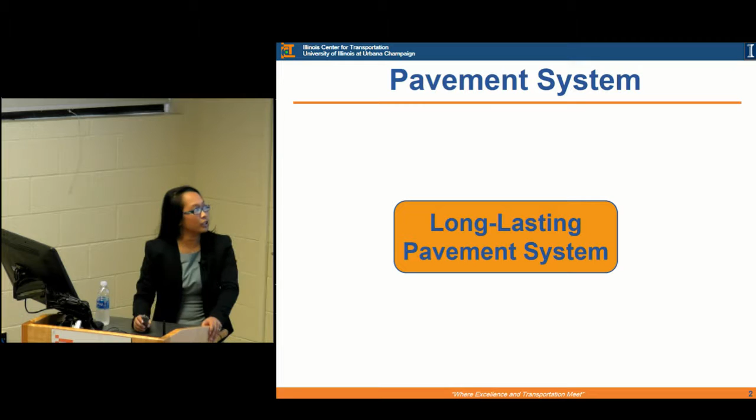So first, let me set the higher knowledge, or what's the main umbrella of what we're doing here. First, we know that in order to design a long-lasting pavement system, we have to include some critical parameters, including materials, loading, pavement structure, and environment. This process is widely used in any pavement design approach.

For instance, in the US, we use a mechanistic empirical approach wherein we couple two approaches. When we talk about mechanistic, essentially we're using either analytical or semi-analytical modeling to predict pavement responses in terms of strains, stresses, or deflections. That is paired with an empirical domain where those responses, for instance in terms of strains, are quantified using transfer functions to determine the number of repetitions before the pavement fails in a specific type of distress.

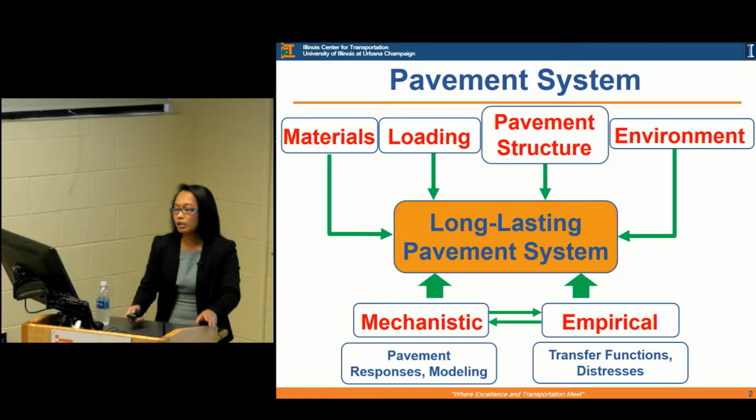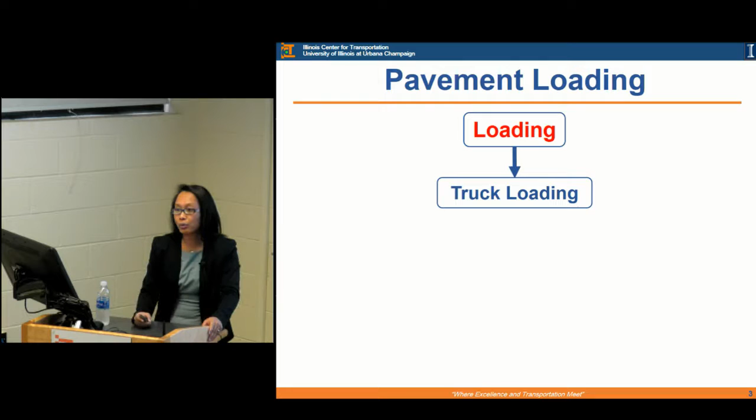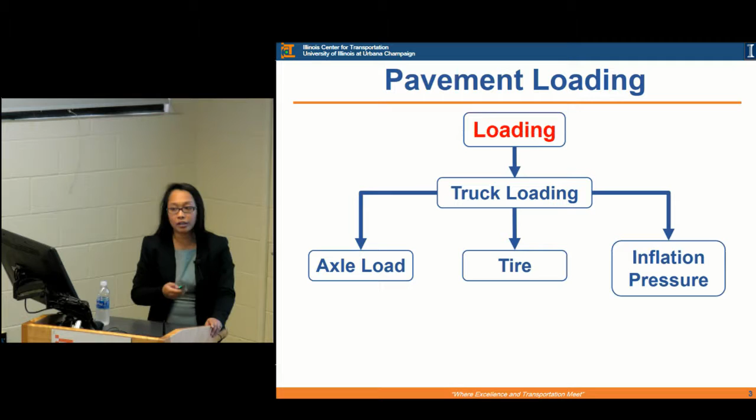In particular, for my presentation, I'll be focusing on the loading component of this wide topic, and particularly truck loading, as we know, is the governing factor in pavement design. In accordance with this, we know that there's a given axle load, tire type, and inflation pressure that govern this truck loading. In reality, combining these parameters, what we expect is a three-dimensional contact stress at the tire pavement interface.

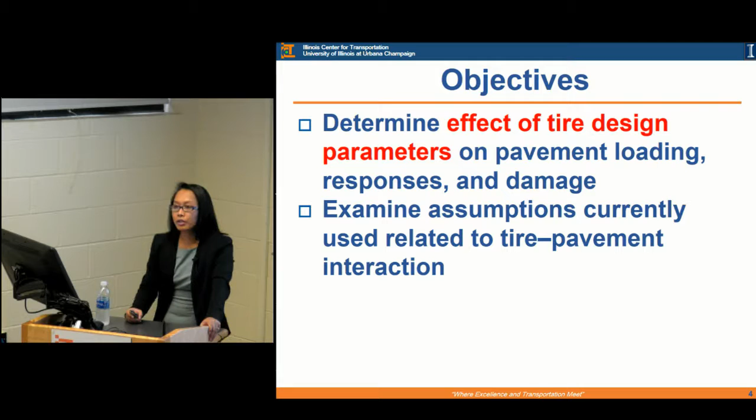For the objective of this project, what we wanted to determine is the influence of different tire design parameters on pavement loading, response, and damage, and also how current assumptions in pavement design as of now relate to this tire-pavement interaction.

For the methodology of this project, what we've done is consider two typical pavement structures. You can see here the corresponding thicknesses. For the thin pavement, which we'll use throughout the presentation, it simulates a low volume road where we have a single asphalt concrete layer of 4 inches and a granular base that is 8 inches.

On the other hand, for an interstate highway, we considered three different asphalt concrete layers: the wearing surface, intermediate layer, and binder layer, with corresponding thicknesses, and also a granular base. As I pointed out, the main premise is to understand how these contact stresses... the partnership came from Michelin because they were the ones providing these three-dimensional contact stresses considering different tire parameters, which we'll see later on.

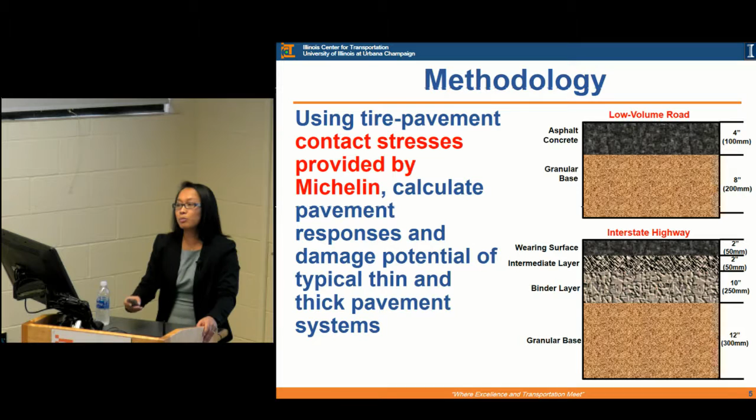From our group's perspective, what we can provide is how their contact stresses influence pavement damage. At the end of this project and presentation, we'll show you how we take into account not necessarily the full damage of these pavement simulations, but damage potentials of these two pavement systems.

First, I'd like to introduce the finite element model that we used for this project, and give a quick overview of the different assumptions and considerations we addressed. First, we considered a dynamic implicit analysis, which means we are considering the mass inertia and damping forces on the pavement structure as it's loaded by a truck tire.

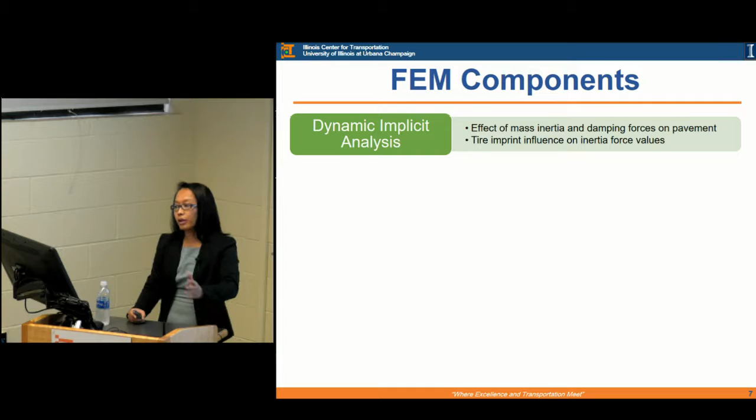Correspondingly, the difference of these components in the tire imprint would also influence the corresponding inertia value, so that's considered. The second one is the material characterization.

For the asphalt concrete, we consider it as a linear viscoelastic material with a nonlinear temperature distribution throughout all those AC layers. Also, for the base layer, for the thin pavement, as I've mentioned, that simulates the low volume road, we...

consider a nonlinear stress-dependent material property. On the other hand, for the thick pavement, given the thickness of the three layers that we've put on top of the base, we deemed that it was acceptable to characterize the base for the thick pavement as linear elastic.

As I've mentioned, we are using three-dimensional contact stresses, again highlighting the fact that in reality the contact stresses are non-uniform, and not only in the tire imprint, but also in terms of the stress distribution in the three orthogonal directions.

We're also considering contact area at the tire-pavement interface. Additionally, we are moving that tire-pavement contact stress continuously. Essentially, what we've done is provide a linear variation upon the entry and exit of that tire contact stress over a given element, so it simulates as if the tire is moving smoothly over our pavement model.

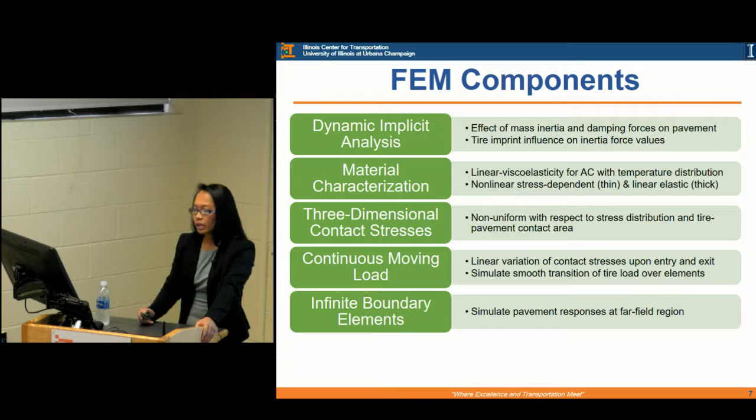We'll see this in the next slide, but just a quick definition: we used an infinite boundary element. The main premise is we didn't want our pavement finite element model to be extremely large, which costs computationally—the time to do the simulation would almost take forever if we tried to simulate a mile-long road, and that's not really feasible. So we use these infinite boundary elements to limit the geometric domain of our model while still simulating the far field region of the pavement structure.

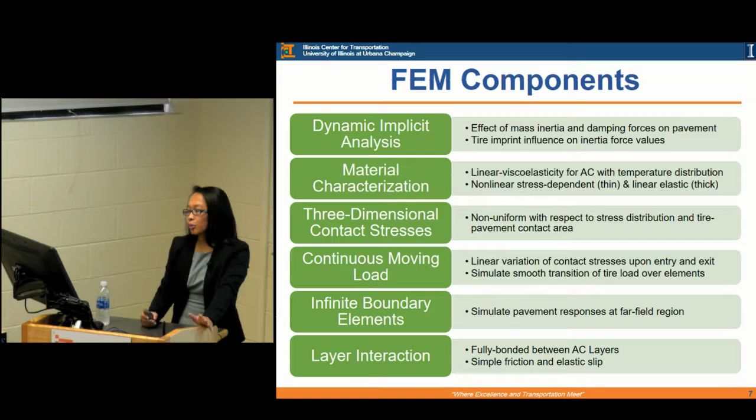And lastly, we also included layer interactions. Between the AC layers, we considered fully bonded conditions. And obviously, the interaction between the AC and the granular layer down to the subgrade will be different, so that's also accounted for.

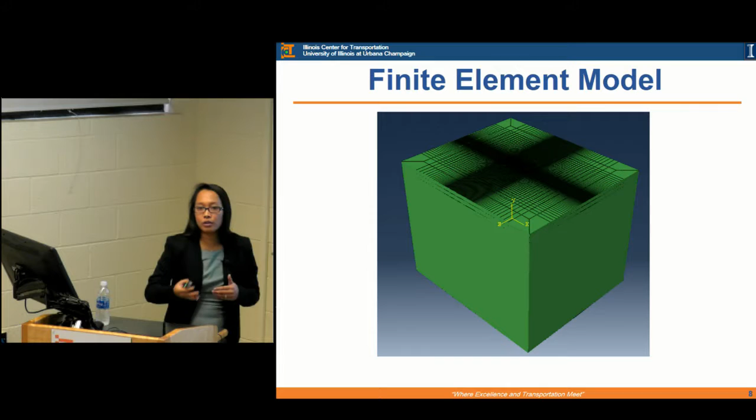Here's a picture of, I believe, the thick pavement model. Generally, the height or depth of this model is around 4.5 meters. And the planar geometry is driven by the tire type, so the dual tire assembly will have a slightly different geometry than the wide base tire assembly.

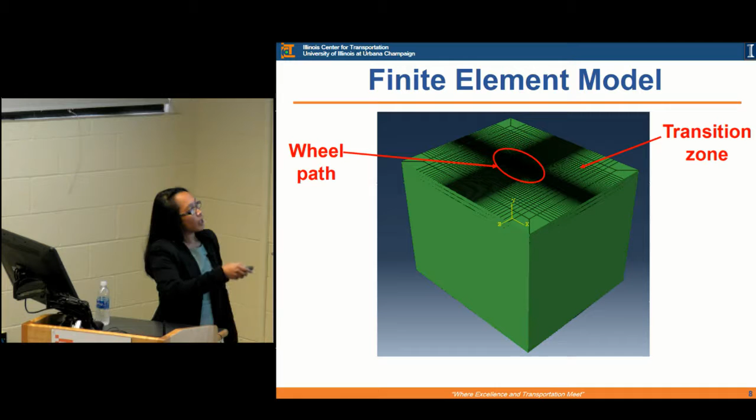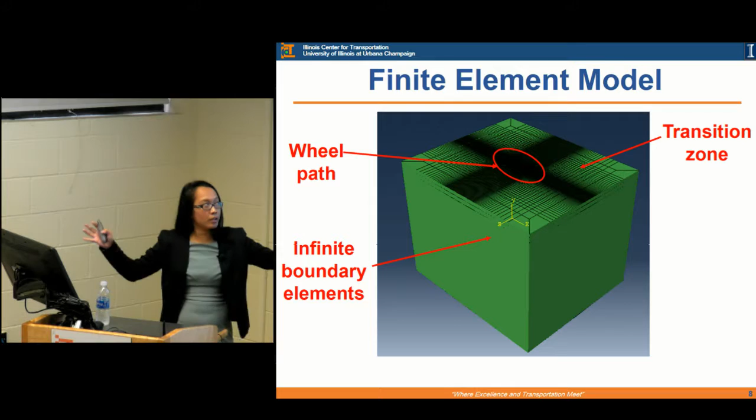Breaking it down, this highly dense area appears black because as we discretize this, it's very fine meshing, so in this view it's highly dense and appears black. We also have a transition zone between this fine meshing and the infinite boundary elements, again to simulate that far field region, so the responses of these boundary elements will tend toward zero.

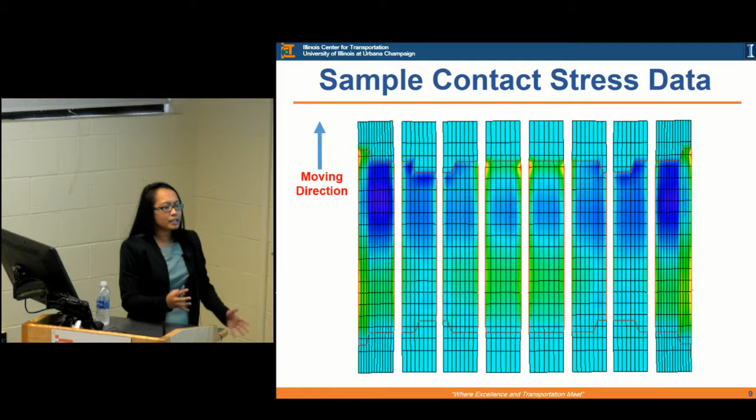I want to share with you, from Michelin, as I've mentioned, we would get three-dimensional tire-pavement contact area data. Here's a sample picture of the data they would send us—essentially each grid will have a data point. I'm not going to share the details for the sake of time, but essentially we had to prepare these data to be compatible with our pavement model.

For the numerical matrix of this project, we have what we call the reference cases. I'll introduce the different categories of cases we've studied. For the reference case, we have the wide base tire, 445 being the nominal width, compared to a conventional dual tire assembly, D275, again with nominal width 275. The steer tire is at the front cab of a semi-truck, and it's the same as a dual tire assembly, except it's just one of the dual tires. The applied load for this reference case is 37.8 kilonewtons, although for the steer tire it was decreased. These are typical values Michelin provided us, and all these tires were inflated at 690 kilopascal.

Another category we dove into is the same tires, holding the inflation pressure at 690 kilopascal and changing the applied load from 9 to 45 kilonewtons. Now, instead of holding the inflation pressure constant, we hold the load constant and inflate from 480 to 830 kilopascal.

Centrifugation—I guess it's easier to explain in terms of speeds. They give us a low speed of 5 miles per hour and a high speed of 55 miles per hour, and that's what they mean by centrifugation speeds, while holding the applied load and tire inflation pressure of the wide base and dual tire at the same level.

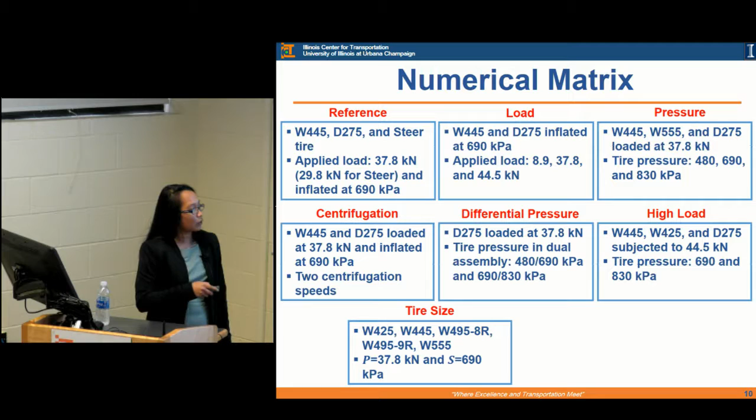They've also, and I believe, I don't recall which market they're using this currently, but here what we're seeing is a 495 millimeter wide base tire. Essentially it's the same tire, but what they've changed in the design is the number of ribs, designated by -8R and -9R.

555, on the other hand, is one of their models. This is not currently sold in the market, but they wanted to see if it's worth designing this tire. And now we're holding the applied load and inflation pressure constant.

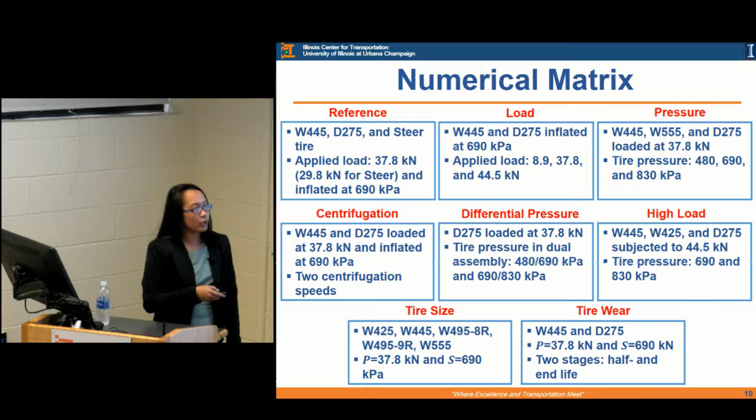The last component or category that we compared is tire wear. We have the reference case, which is the brand new tire, and then we have two stages, half life or end of life, where pretty much what they've done in their model is remove some portion of the depth of the tire, simulating the wear of the tire.

I do want to disclose that for the sake of time, I won't be going into all the results, but I will be going through some of the results to see how the new method we've come up with corresponds to the final results.

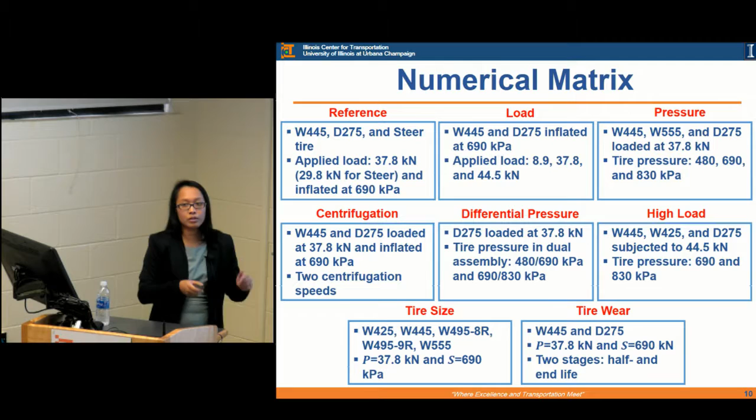So first, we are going to go through the analysis of traditional point response. The importance of this comes into going through the MEPDG methodology, where you try to take a critical point response from a pavement structure and apply that to the distresses. Later on, I'll introduce another method, which doesn't necessarily use a point response, but a more three-dimensional domain. So with this traditional point response, as we know, we have loaded pavement structures.

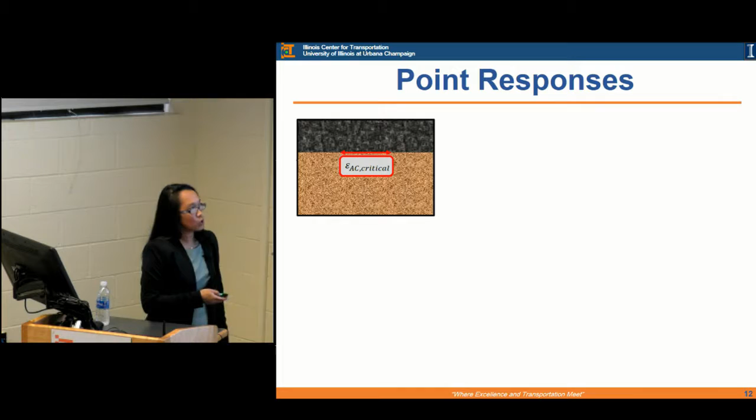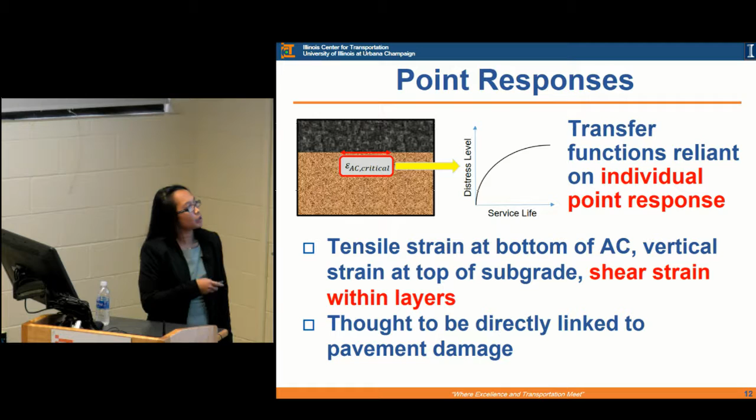We identify some critical responses. For instance, in MEPDG, they use the tensile strain at the bottom of the AC or vertical strain on top of the subgrade — these are just some examples. Another critical response not necessarily implemented in MEPDG, but found and proven in field and other studies, is the shear strain within the layers, especially within the AC, that correlates to near surface cracking. As I've mentioned earlier, these critical responses are input into transfer functions to predict the distress level.

Remembering the pavement structure and FEM picture we have, essentially what we've done is extract different pavement responses. Just to disclose, we have here all the strains in different directions. 1 is the X direction, the longitudinal strain at the bottom of the AC. This is the transverse, 3, also in the AC. The surface, and 2 is the vertical on top of the subgrade, within the subgrade, the base, and also the AC. And now the shear, 2-3, AC, base, and subgrade, and we also have the von Mises stresses.

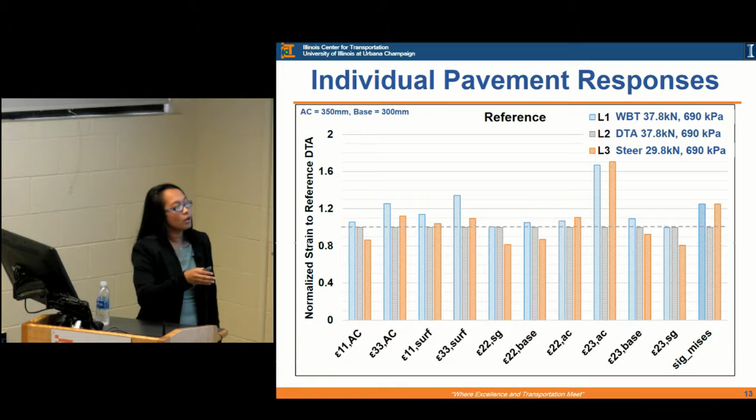But for the sake of relating it back to conventional pavement response, for a bottom-up transfer function, we may use this tensile strain at the bottom of the AC, and here we can see the difference between the reference cases of wide base tire, dual tire, and steer. It's clear that between these three reference cases there is a clear distinction, most predominantly in the shear strain. Although in MEPDG and current pavement design this is not used, we do want to point out that it's a pretty important response.

As I've mentioned, these three we can relate bottom-up and top-down for rutting, and this is near surface. Now, interestingly, as we moved on in this project towards the different categories introduced at the beginning, we're comparing here the influence of inflation pressure with respect to a wide base tire with a 445 millimeter nominal size. If we were to quantify the bottom-up fatigue number of repetitions to failure, we see that, interestingly, for the point response, as you almost double the inflation pressure, the difference was not that much.

To us, it didn't quite make sense because the contribution in terms of the three-dimensional distribution of the stresses is pretty important. Although we can quantify that the shear strain is differing once we go into the damage domain of the stresses in terms of number of repetitions, it's not going to be seen through this approach.

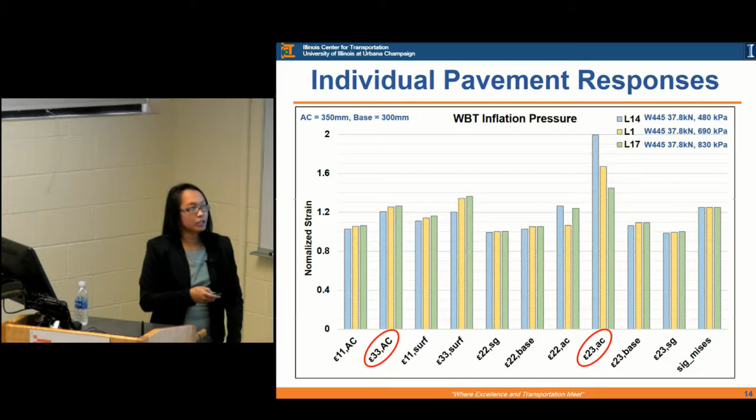So what we've done instead is we started talking and decided, why don't we try to quantify the pavement responses in terms of its three-dimensional domain? We're inputting a three-dimensional contact stress, so why don't we try to output a three-dimensional parameter out of it?

With this approach, just as a quick overview, the conventional pavement approach focuses on getting a point location, a point response at a specific location, although we know that any distress nucleation is actually governed by the surrounding weakened region.

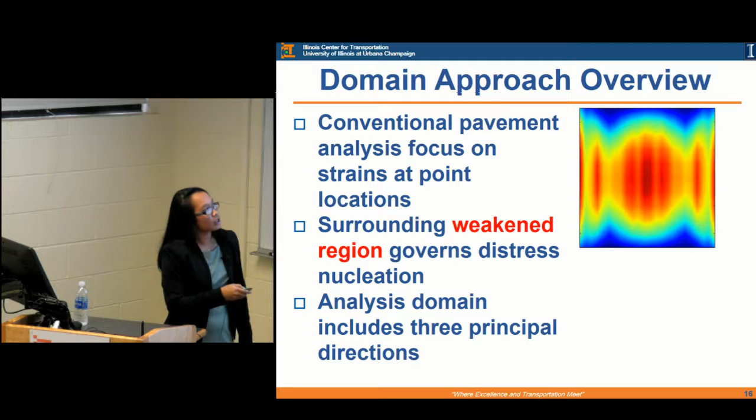So what we wanted to do is create this analysis domain that includes the three principal directions in 3 dimensions. Just as a quick schematic, here's a sample of the vertical pressure, as a pictorial representation of the fact that we have a three-dimensional input that becomes an output.

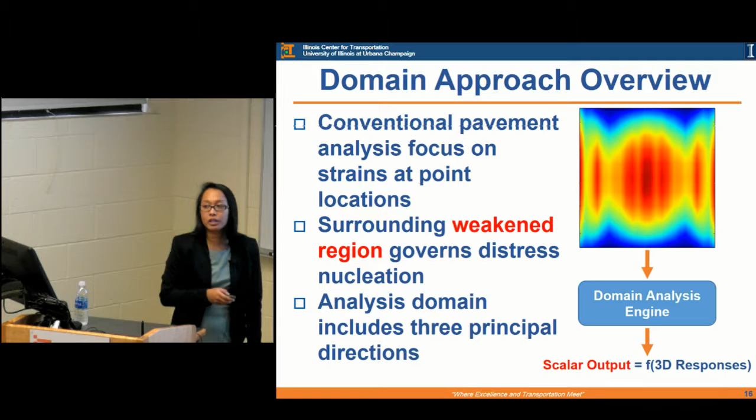The responses that we get from the simulation become an input into this, what we're coining as a domain analysis engine. And the nice thing with this approach is that from this we get a single scalar output that is a function of three-dimensional responses - one value that is dependent on three-dimensional responses.

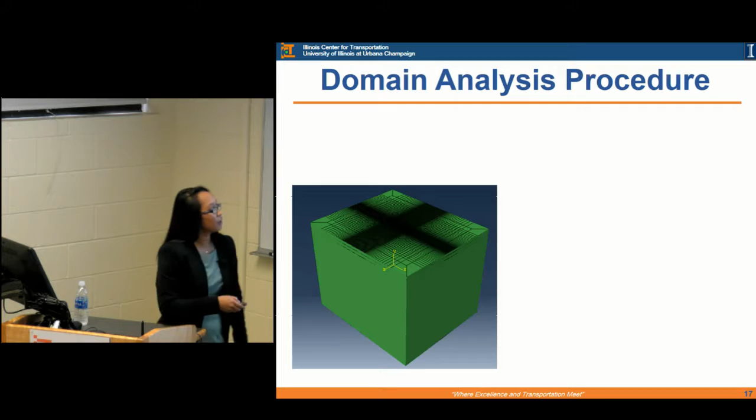So for the procedure, we'll walk step by step through how this new approach is done. First, recall our pavement model. Instead of using the entire domain, as we know it tends to zero at the side, and we wanted to take a look closer to the tire imprint.

So what we've done is define a subdomain. Pretty much imagine numerically we're coring this pavement structure. Generally what we do is we go one meter squared from the top planar view, and depending on the pavement structure, we go throughout the full depth of the layers, and one meter into the subgrade.

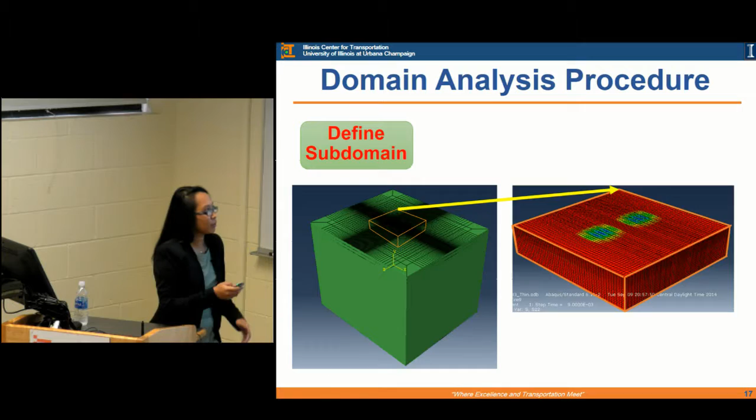So that's essentially the subdomain. Although geometrically this is not representative of what I'm saying, this schematically shows you how we're coring the pavement structure. So after the subdomain, each of those elements can give us a lot of information.

What we've decided to do is, for instance here, each of those elements can be represented by different stress values, shear and also normal stresses, but that can also be represented by principal stresses as you try to rotate this cube, eliminating the shear, which is still representative of this stress state.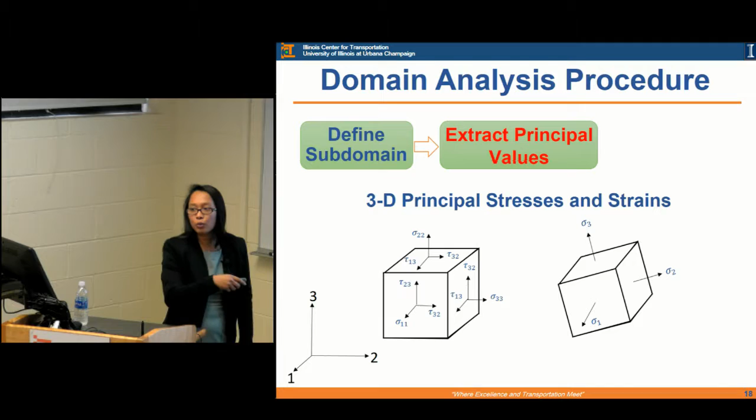So what we've done is we extracted the three-dimensional principal stresses and strains from the subdomain that we extracted previously. Now our next step is to calculate this P-Q, and I'll go into what this means.

So P is the mean stress. As you can see here, it's just the average of the 3 principal values, and Q is what we've coined as the shear stress indicator, which in the mechanics domain is also related to an effective shear stress.

As you can see here, we apply it in the stress domain, and correspondingly the same thing in the strain domain. So we want to have a more comprehensive representation, not only in the stress, but also in the strain domain. So again, what does the P value represent for us?

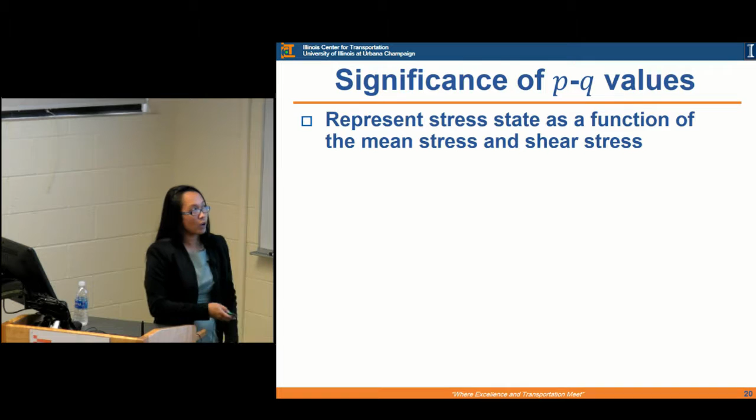As I've mentioned, it represents the stress state as a function of the mean stress and shear stress. We saw how that is calculated by the equations we saw previously.

Now, borrowing from plasticity theory, if you recall this Mohr circle, we can actually correlate this into this shear stress indicator, or effective shear stress, with respect to the mean stress.

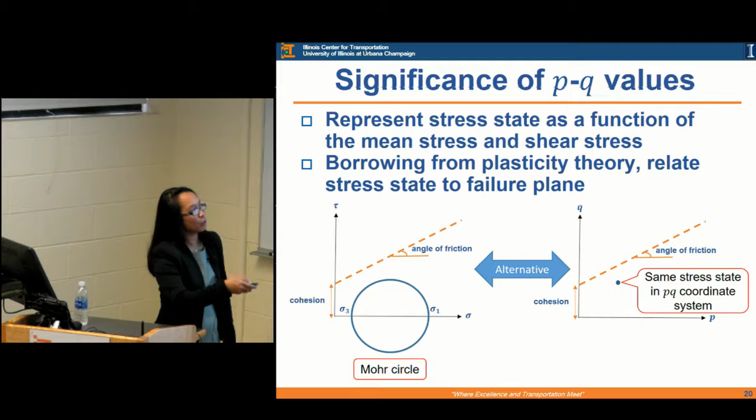Essentially we're representing this Mohr circle with a more Cartesian coordinate system. Instead of x, y, we have P and Q. And as you can see, we're still transferring all the important information because it's the same failure plane that can be applied, except we just changed the axes a little bit.

So from this, what we're seeing here is a critical 2D cut or cross-sectional cut along that pavement model that we have. Essentially, this cloud of points P and Q is what we're seeing here, and I'll explain more what these cloud of points mean in the next slide.

But for us, it was important to build these contour plots, a two-dimensional representation of the shear and the mean stresses along the depth and also along the width. So zero is in the middle of the tire.

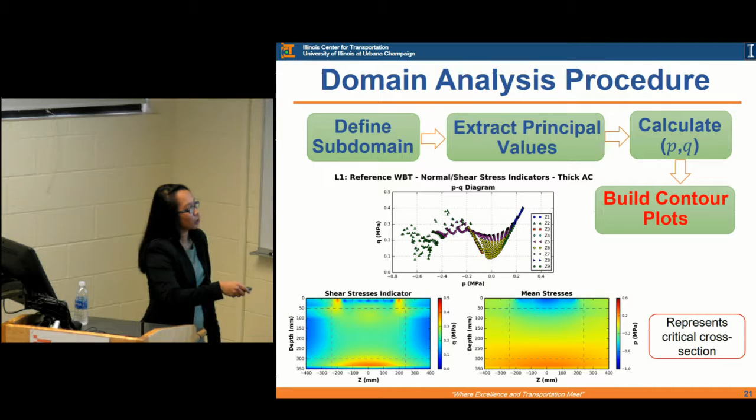So as you can see here, this is probably a wide base tire. We're just seeing how these clouds of points are spreading in the shear and mean stress domain. So just a quick check for us.

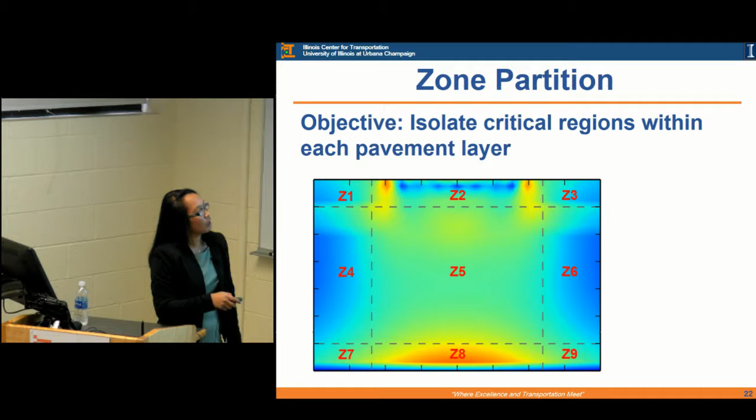Now, what's the importance of this contour plot? We realize there are critical regions you can see here. Generally, tire edges are pretty important. Since we know the near surface is influenced not only by high compression but also high shear, we decided to introduce this zone partitioning to highlight that the near surface region is really important. Also the bottom region is important, and the remainder of the cross section. As I mentioned: the top shear surface, bottom, and then the remainder.

Now, how are these limits defined? First, we use the geometry of the tire width, so whether it's wide base or dual tire, it doesn't matter, it will follow that tire width. Generally, and as seen in literature, the near surface is within 2 inches from the edge of the tire width, so we've added that. So these vertical limits are defined by tire width plus 2 of these x's, which is 50 millimeters or 2 inches.

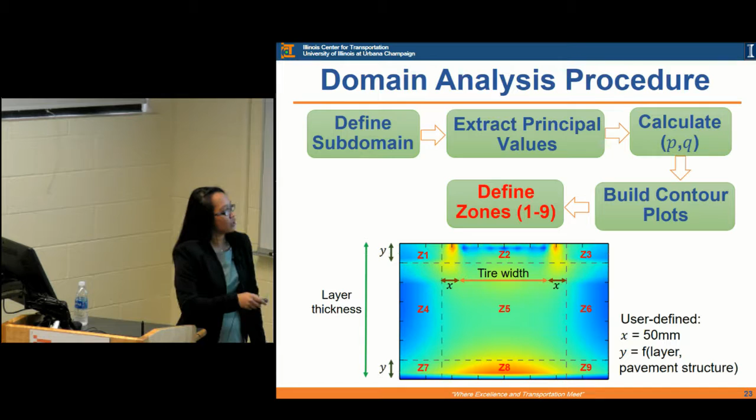Now, using the layer thickness, how do we define these horizontal limits? This is dependent on the pavement structure. For thick pavement, I believe I have 350 millimeters, and generally high shear strain or near surface distresses show up within 3 to 4 inches. So as an example, the limit I've chosen is 100 millimeters, mirrored here as you can see, nicely enclosing these dominant areas.

So explaining what the point cloud means that we saw earlier: following this zone partitioning, Zone 1 has high compression because it's closest to the tire, and also relatively high shear. Zone 2 has definitely higher compression than Zone 1 because it's directly underneath the tire, and because of the high shear we observed it increases to the left towards more compression, but also high shear. Zone 3, due to the symmetry of the contact stress input, we should anticipate symmetry, so Zone 3 just overlaps Zone 1.

Zone 4: thinking of a simple bending beam example, as you move toward the center along the depth, the stress values approach zero, so this moved inward, although there are still some levels of compression and shear. Zone 5, since it's directly underneath, there's a bit of high shear. Zone 6 corresponds to the Zone 1 and 3 symmetry, so it's placed on top of Zone 4.

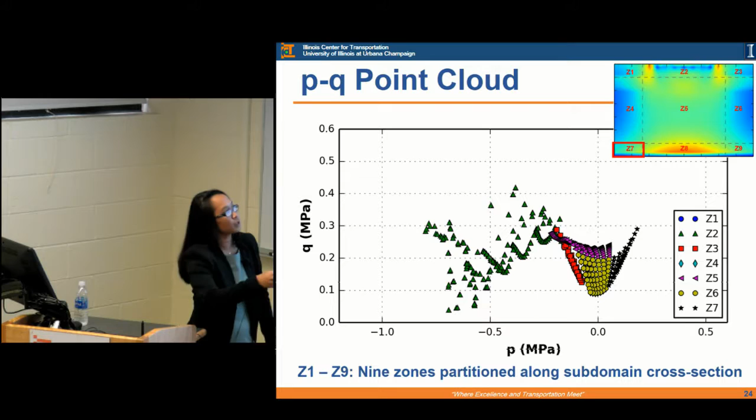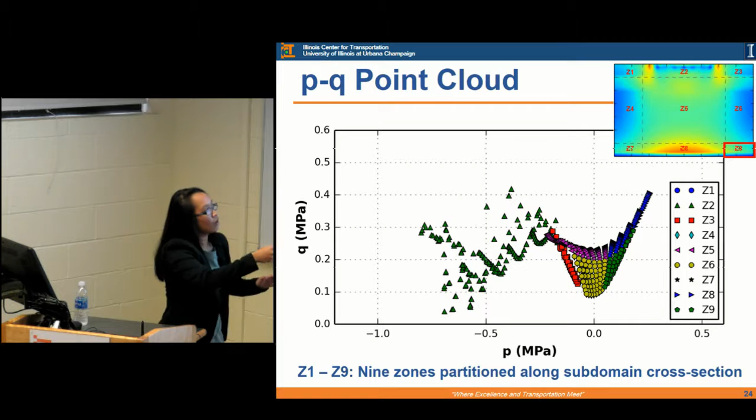Now we're moving into the tension part of that bending beam example, although it's not that simple, just for illustration. Zone 7, we're moving into tension with still some values of shear. Zone 8 has the highest value of tension and also shear compared to Zone 7, and similarly Zone 9 overlaps with Zone 7. So this is just a pictorial representation of what the point cloud means.

Now, how does this relate to pavement distresses? Although we're quantifying a bulk response, and I can't tell you if this will fail in top-down cracking or rutting since we're giving a bulk or comprehensive parameter, we can relate it: we've identified critical zones, for instance the near surface or Z2, which for AC can show top-down fatigue or shear and rutting. Zone 8 we've identified as a critical region for bottom-up fatigue, and we'll use these zones later on.

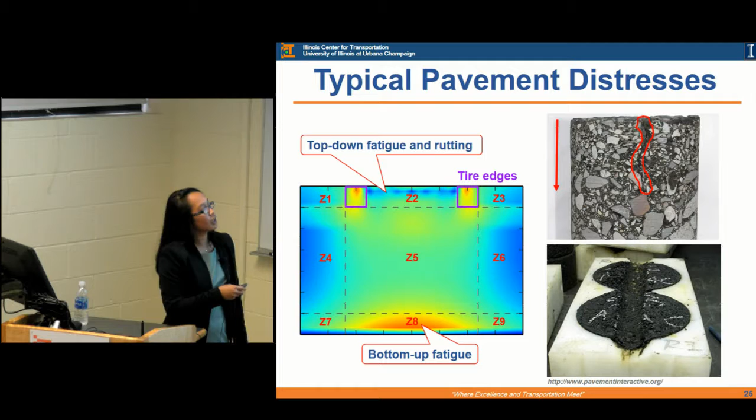For subgrade and base, we've only kept or analyzed Zone 2, although we have all these values should we extend to more analyses. Also, we have an isolated study or analysis for tire edges, because that tends to be a very high shear area.

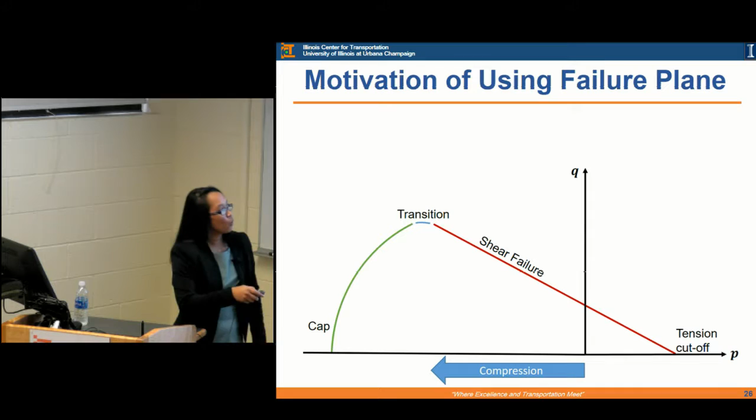Now that I've comprehensively shown you how that nice PQ diagram, that cloud of points, looks nice, but how does it relate to stresses or damage potential? What we've done is borrow from mechanics this failure plane, called a modified Drucker-Prager cap model. It's in the same line as Mohr-Coulomb, but it's a different model.

Essentially, what we wanted to do is use this three-part model. As you can see, we have the linear part, we have the cap to limit the amount of compression or hydrostatic stress in this domain, but also a transition.

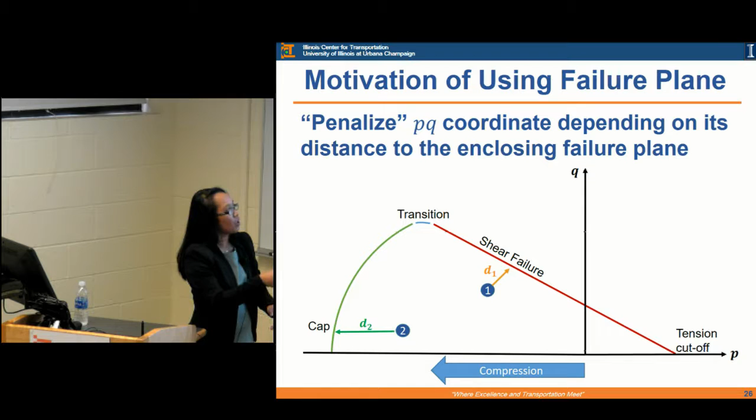Imagine we have the spread of clouded points within this failure plane. Since we're just doing one pass over the model, we wanted to relate the distance of each of these points to a shear failure, or to this failure plane. Essentially, this point should be penalized more than this point because it's farther from failing in compression, although, as we know, it's a mixture of compression, normal, and also shear.

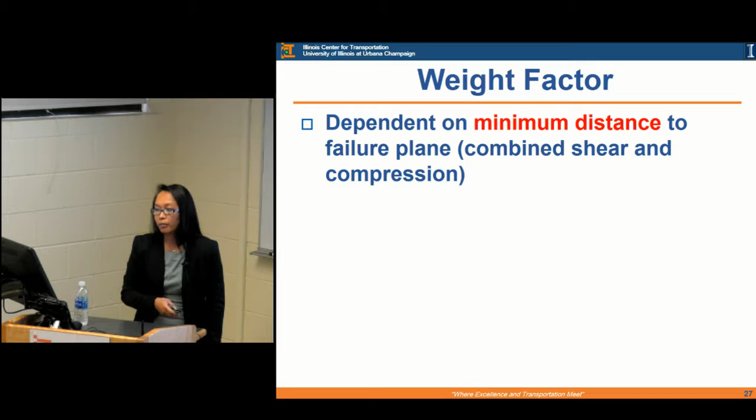So in order to do that, we've come up with a method to assign weight factors depending on the minimum distance of that point to that failure plane. And the next challenge is how do we actually do that?

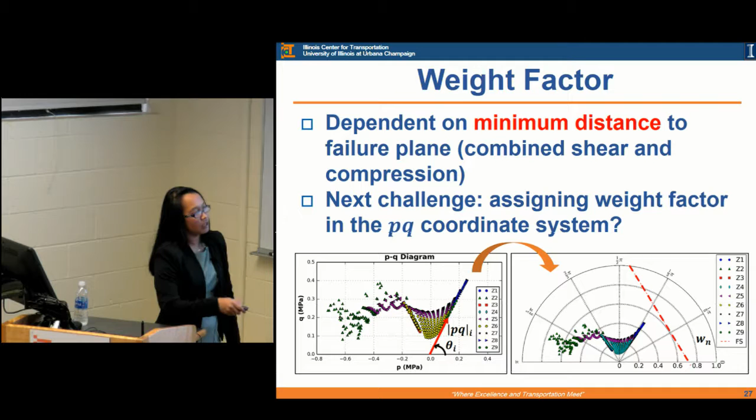That's 30 different sectors partitioned by this. What we've done is go to the midpoint of each of these sectors, find the minimum distance to this failure plane, and whatever's inside of this failure plane gets a weight factor. So the closer you are, then the likelihood to fail, and outside is pure failure. Also, the weight factors that we've assigned inside will always sum up to 1.

And here's just a simple example - this is the reciprocal, so the closer it is. As we can see here, for example, if D1 is less than D2, then the reciprocal obviously will be higher, 1 over, and then the weight assigned to this D1 will just be greater than W2.

Another consideration that we had to perform in this study is the fact that the geometry of the model differs. And that also has the consequence that the dual tire assembly will have more points than the wide base tire. So if we were just to add points, it's not a fair comparison, because one has more points than the other.

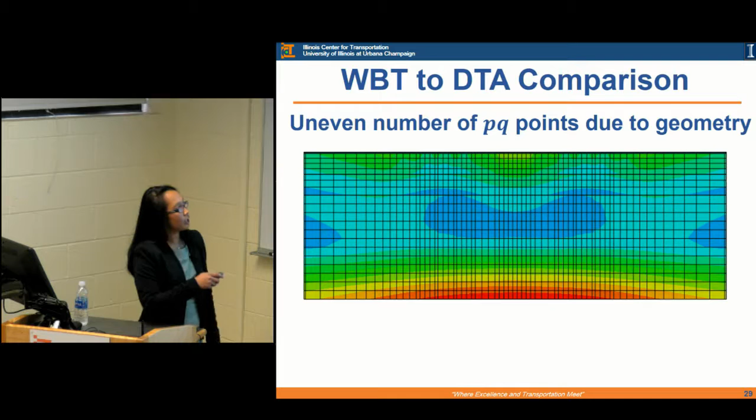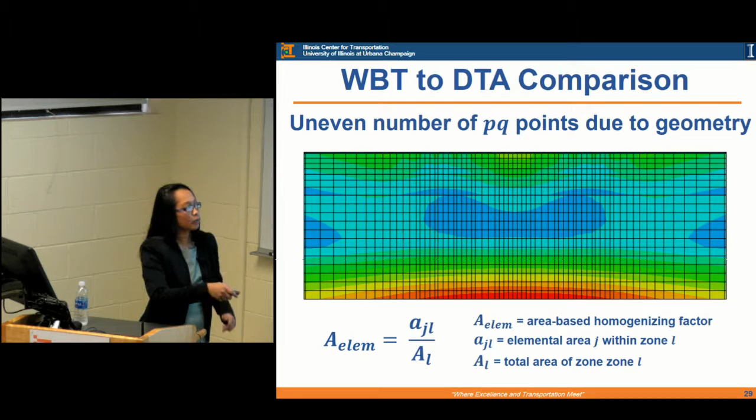What we've done here along the cross-sectional, we've used the area of each of these elements and apply this homogenizing factor relative to the total area. So then we assign this another weight, as you will. So then whatever geometry or however much meshing or partition you have within the cross-section, whether it's wide base, dual, or even different types of wide base, geometrically it will still be comparable.

So I've said we are following this analysis roadmap. Now we're also applying that homogenizing factor, which is that two-dimensional geometric correction.

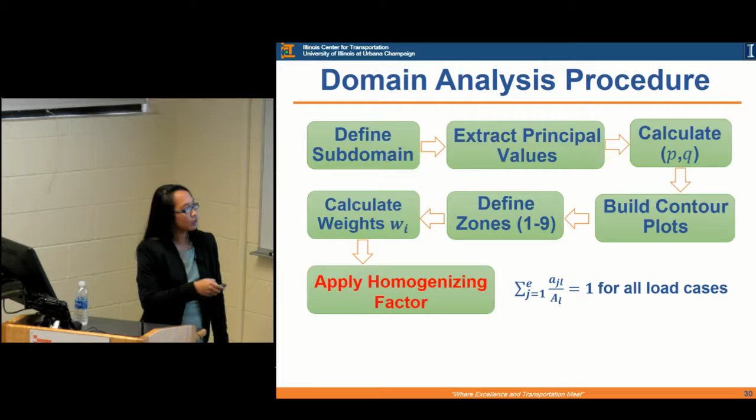And as you can see here, what we're seeing, along the tire imprint or along the longitudinal direction, so along the contact length of the tire, these cross-sections also vary. So we've also realized that we don't only have to correct in the 2D plane of this cross-section as it changes because of the tire width and along the width, the geometry of the tire, but also along the contact length. As you can see here, the values are also still pretty significantly at a high level.

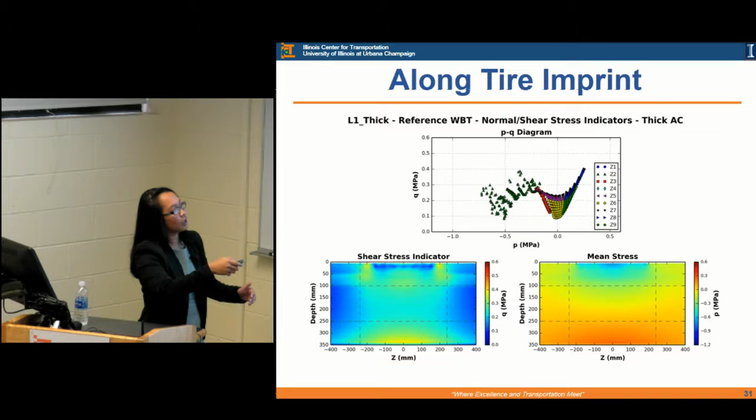So what we've done is take into account not only the PQ coordinate, so the mean and the shear stress, the polar weight to relate it back to potential damage, the homogenizing factor, the cross-sectional, and the one we saw previously, which is along the contact length, is the volumetric factor.

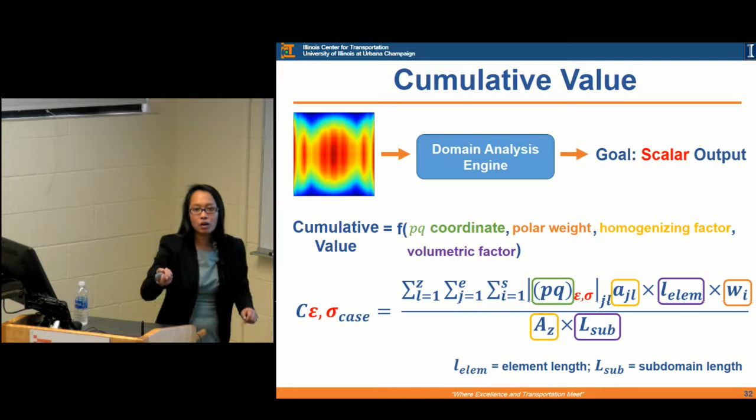So then what we've come up with is to have a cumulative value. As you can see here, summing all of the PQ points, applying that cross-sectional geometric factor, so along the width. Now along the third dimension, this volumetric factor, so this is the element length along the total contact length, and the weight factor to relate it to the potential damage. So using these cumulative values, we are able to account for the three-dimensional impact of our three-dimensional contact stresses.

And finally, the scalar that we'll get is what we've called the cumulative damage ratio, which is normalized to a reference case. And in our case, it'll be the dual tire assembly, since it's the most predominantly used tire configuration.

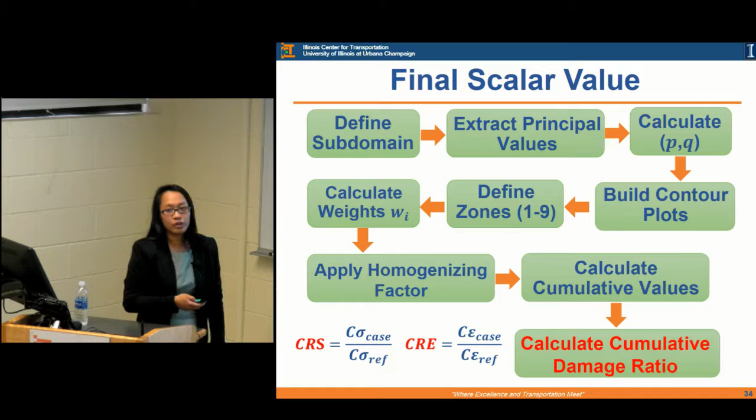And remembering that we have 4 critical zones, 2 within the AC. So within the AC is top-down and rutting, so zone 2. Also zone 8 for the AC because of bottom-up. For base and subgrade, we have zone 2, so that's the third one. And for the fourth one is zone 2 within the subgrade, I'm sorry.

So now that we have 4 of these critical zones, we've also reported a weighted sum value of these 4 critical zones. And the premise of the weight is to follow the highest impact of those 4 critical zones. And so we'll have one scalar value for the entire pavement structure considering these 4 critical zones.

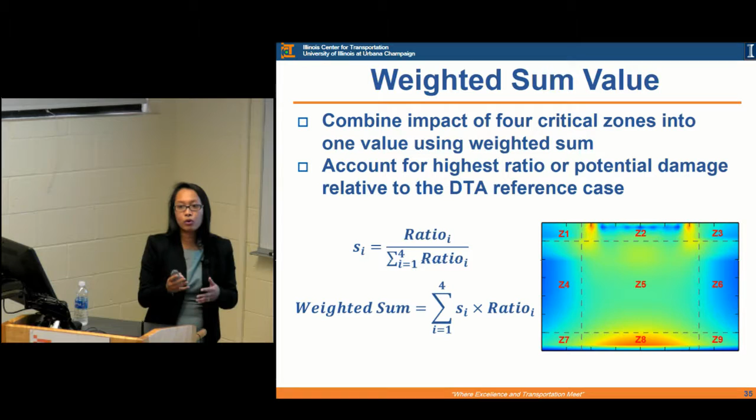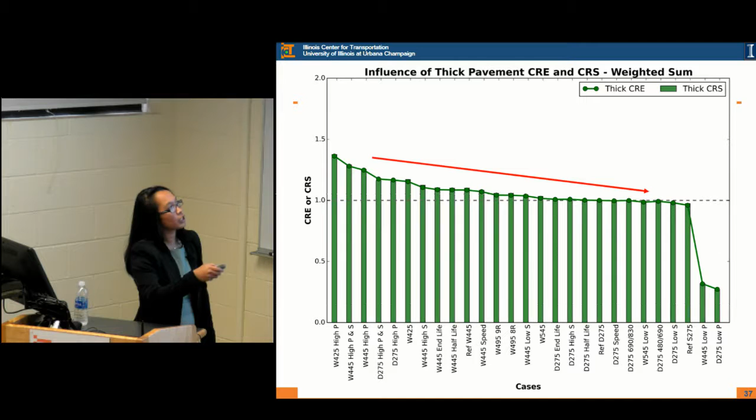For the results of the new domain analysis approach, I won't go through all the details, but I want to quickly show you the 27 cases we studied. What we see is a nice decrease of the cumulative ratio in both the strain and stress domains for the thick pavements.

Correspondingly, the most influential factor, as these are arranged, is the highest applied load, which makes sense. This verifies the characteristic of the method to be able to capture these different components, and as expected, we should have the highest applied load on the left-hand side.

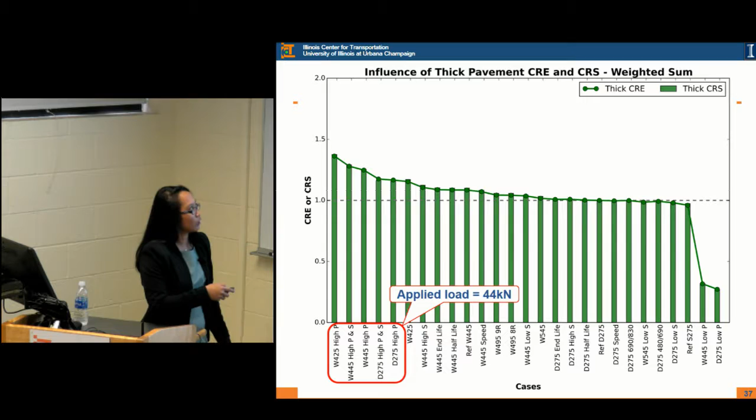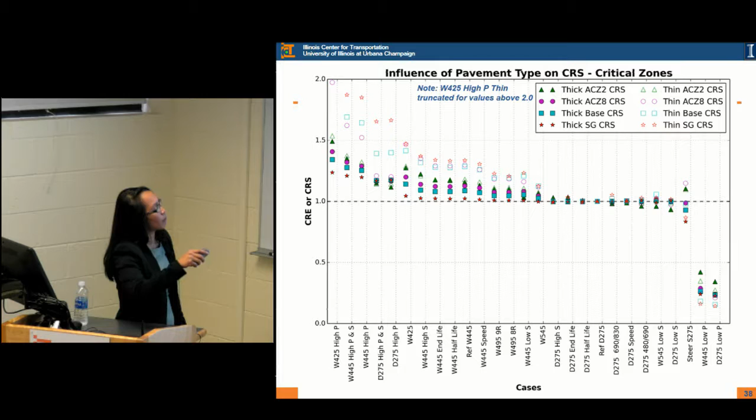Focusing on the left-hand side, it was nice for this new domain approach to capture the fact that the thick pavements, shown as the full markers, fail near the surface, as anticipated. It's evident throughout, but considering these points makes it easier to see: the AC at zone 2 near the surface is the most influenced part of the thick pavement. That's also a nice thing this method captures.

Now on the other hand, for the thin AC, which deflects a lot when loaded with the same tire loading condition, we see that the subgrade and the base are now starting to govern.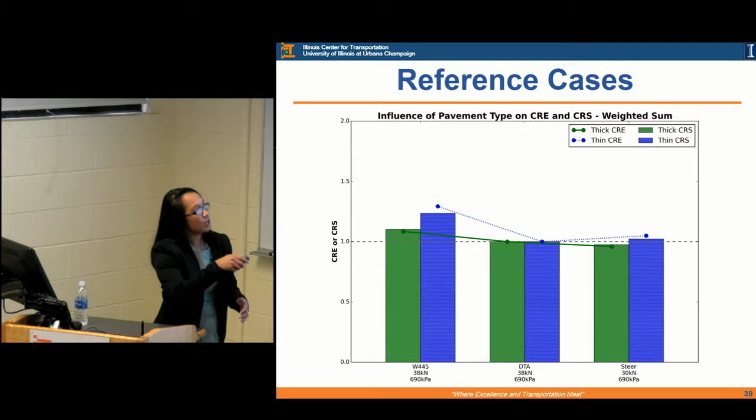Also, for the thick pavement, shown as the green markers and green bars, the CRE values, the circle markers, and the CRS in the stress domain tend to be coincidental, or very close to each other. On the other hand, for the thin pavement, there's a bit of a gap, which we attribute to the fact that thin pavements are probably more prone to capturing the nonlinearity of the problem.

For the tire pressure, we're now introducing the 555, their theoretical tire model. As mentioned, it's not introduced in the market, but they wanted to see how the pavement response would result if loaded with a 555.

Here we have the 445 millimeter wide base tire and the dual tire assembly. As we anticipate, when the tire width increases, the response decreases, and as we increase the tire inflation pressure, it also increases. Recall that the pavement response at critical points shown at the very beginning did not show a variation at all, so this highlights that the three-dimensional impact of changing tire inflation pressure is actually quite important in the three-dimensional domain.

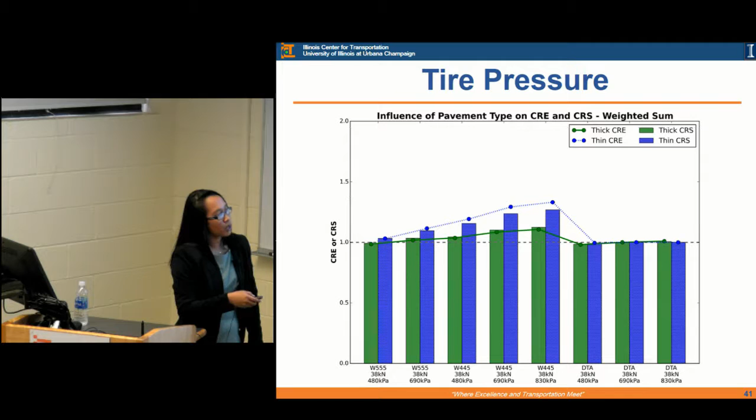Interestingly, the dual tire assembly was not as significantly affected compared to the wide base tire. For tire size, we're looking at all wide base tires: 425, 445, 495, 8 rib, 9 rib, and the new theoretical tire 555. As anticipated, for both thin and thick pavements, we should get a decrease as we increase that tire width.

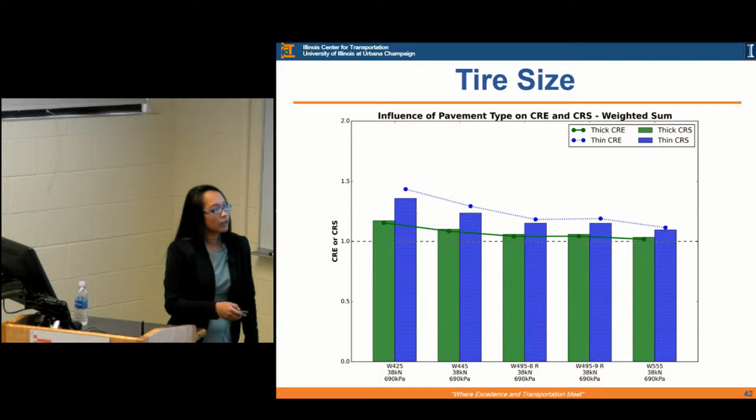Another component we study is the tire wear life, comparing a new tire to half-life and end. Consistently for both pavements, we didn't see a significant difference between the three cases.

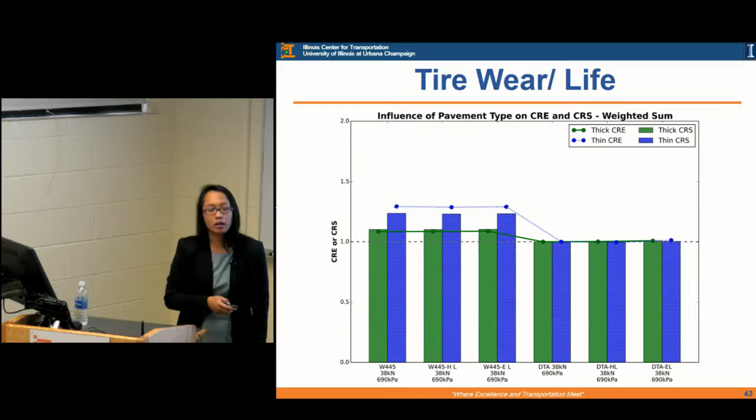Another interesting parameter is the differential tire inflation pressure. We know by definition one tire will be loaded higher than the other. When we did that weighted sum, we're comparing the reference wide base tire, all loaded at 38 kilonewtons, the same applied load. We have the two tire inflation pressure differentials: one tire at 480, the other 690; here 690 and 830; and this is the reference dual tire.

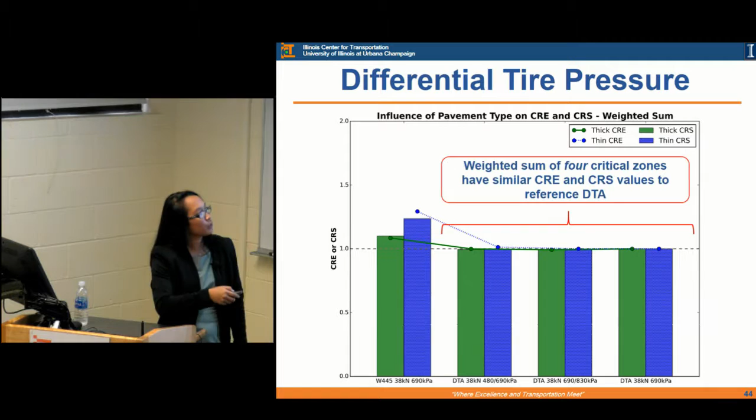So we were quite intrigued why we weren't able to capture any difference between this, if previously we were able to see that inflation pressure is differing.

We went back to the contour plots, and as we can see, the left-hand side is the one with the higher inflation pressure. So 690 is loaded here, 480 is over here, 830 and 690 is over here. First, we were able to check that at least our model is capturing this, because the input, that's the given.

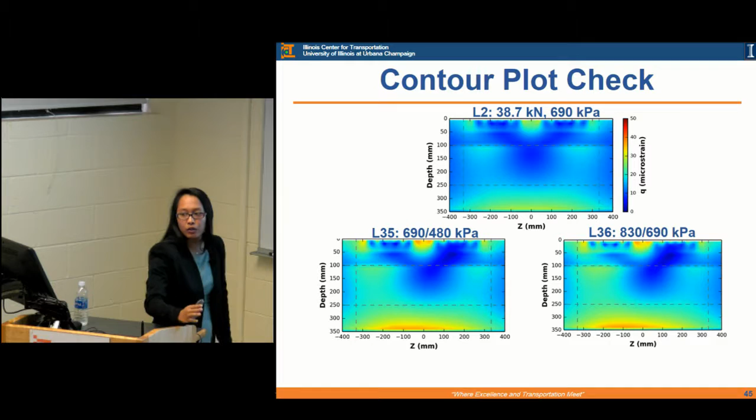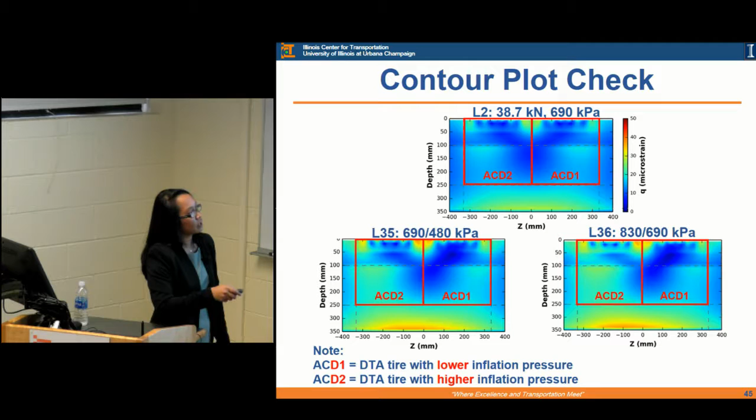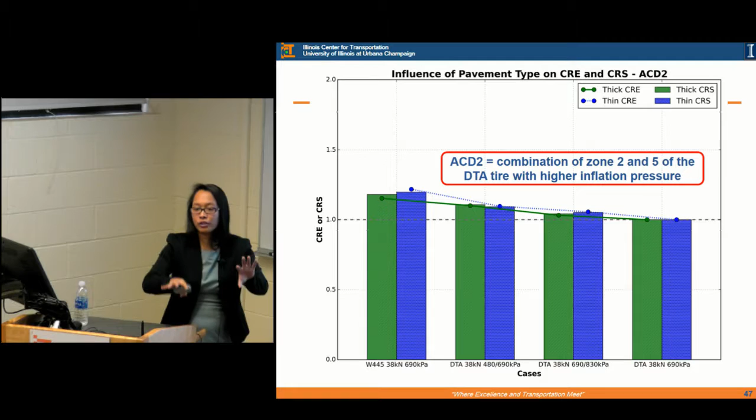As we can see here, as you increase that inflation pressure, we start to see that difference. Correspondingly for ACD2, with the higher inflation pressures, we also see that decrease. So we've introduced this new partitioning method to highlight that for differential, there's a different response on the left and right-hand side part of the tire.

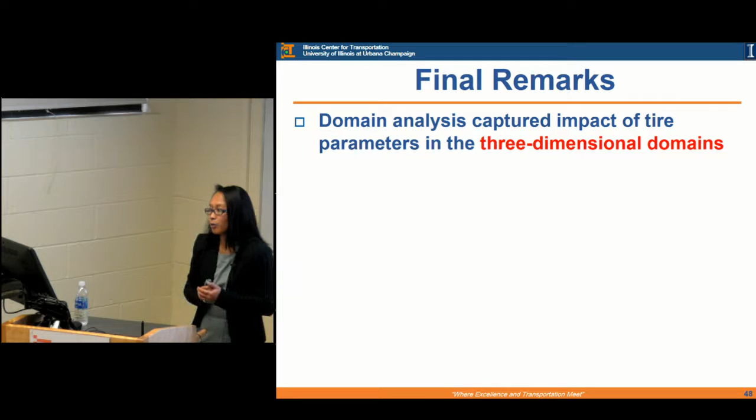For some final remarks on this project: the domain analysis is able to capture the three-dimensional impact in the stress and strain domain. In contrast to a conventional pavement analysis, which is a point response at a critical location, the bulk ratio is able to provide a more comprehensive definition of the stress and strain states.

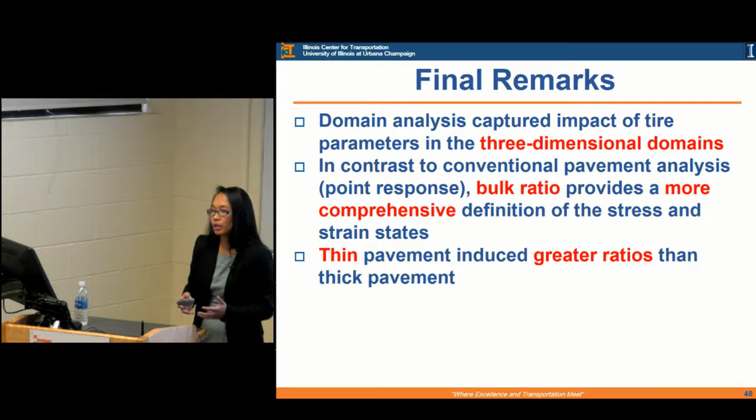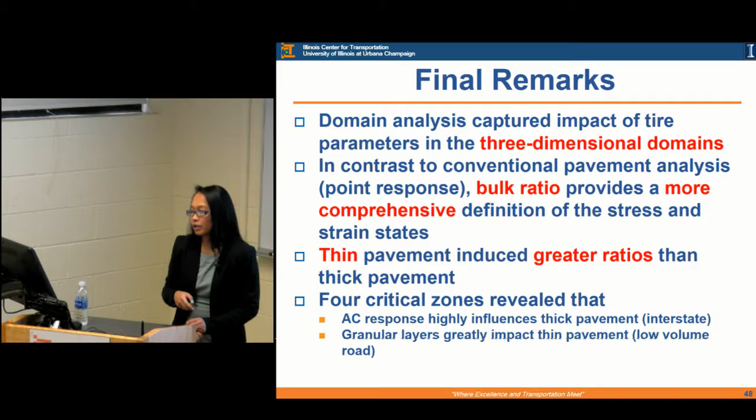What we observe is the thin pavement induced greater ratios at the same loading conditions with respect to the thick pavement. For the four critical zones, I quickly pointed out that for thick pavement, the AC near-surface zone was the most influential for interstates, and on the other hand, for low volume, the granular layer showed higher impact.

Finally, I'd like to acknowledge our center, the Illinois Center for Transportation, for all the help we've received, and definitely the Michelin Americas Research Company. It was a really nice iterative collaboration with them as we were trying to hone this new approach.

And definitely the Extreme Science and Engineering Discovery Environment, XSEDE, is pretty much an organization that handles supercomputing within the US, and without them, I think we'd still be running cases. With that, I'd like to open the floor for any questions.